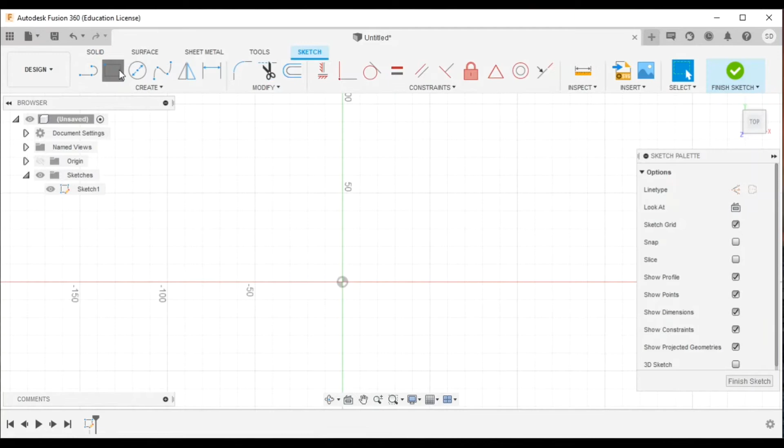In order to make a drone, first we need to create some sketches. For that, I will make a rectangle of 65 by 15 millimeters. Then I will create a line 150 by 150 and at a 45-degree angle.

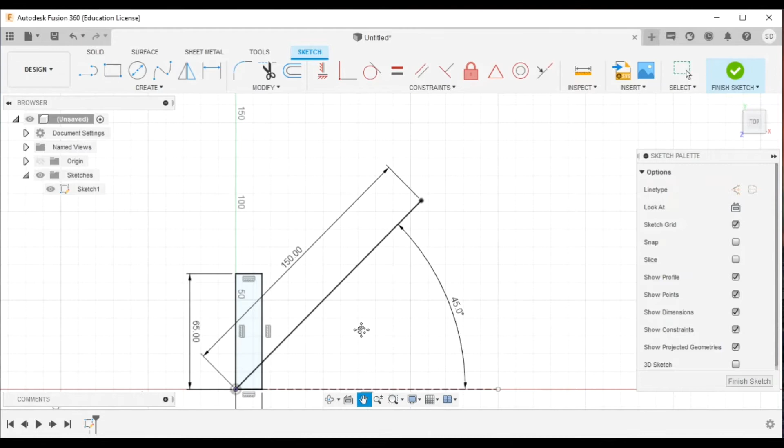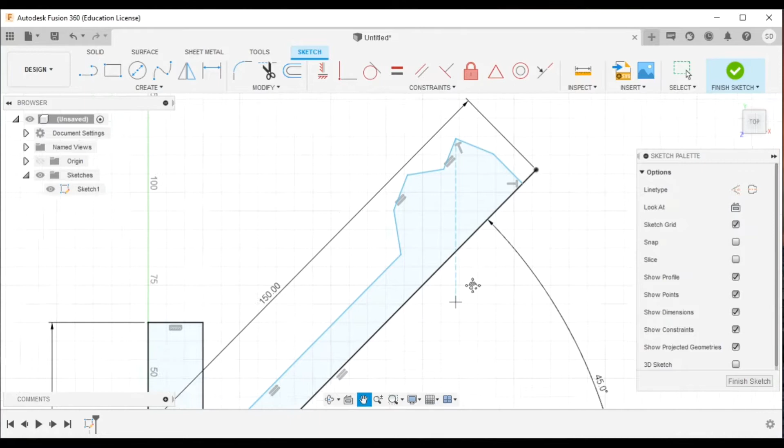Then I'll create some structures like this. Since our drone is fairly symmetrical, we can create one part of it and then mirror it 4 times, so that will be easier.

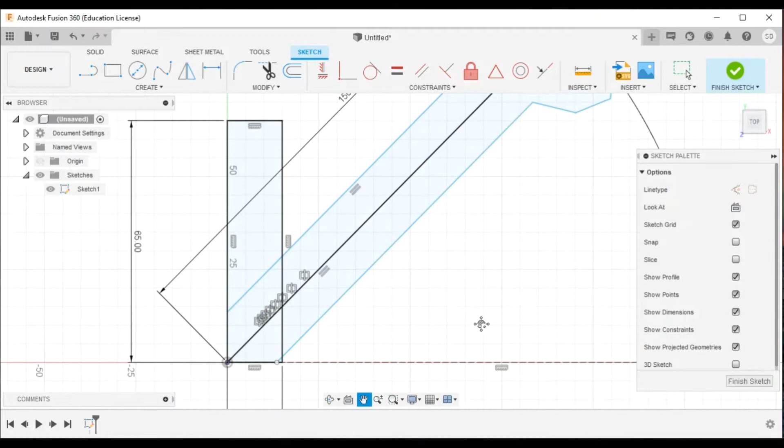So we can drag these points and adjust, and then I'll mirror this. Select these lines and choose mirror line, this middle one. Then let's adjust this rapidly.

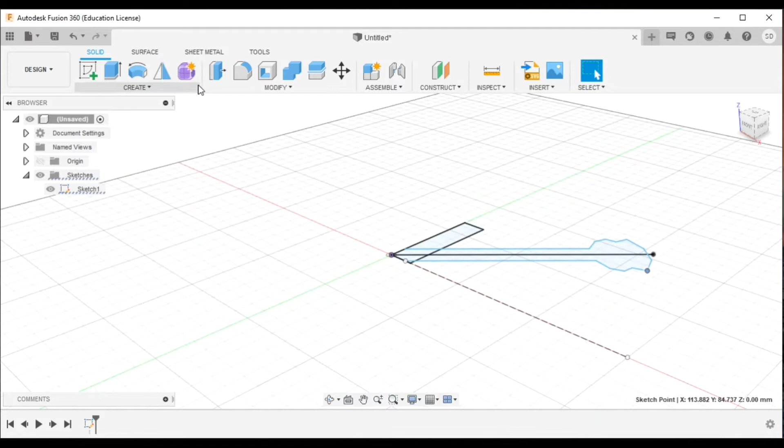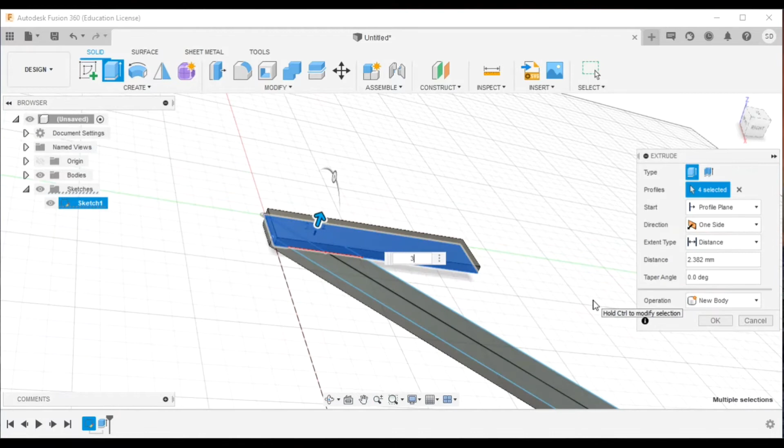After we finish, we will finish the sketch and then let's extrude. I will select all these closed paths and extrude it -3 millimeters, and then from this browser dropdown I will bring back the sketch and extrude the remaining part. Remember, the operation should be new body.

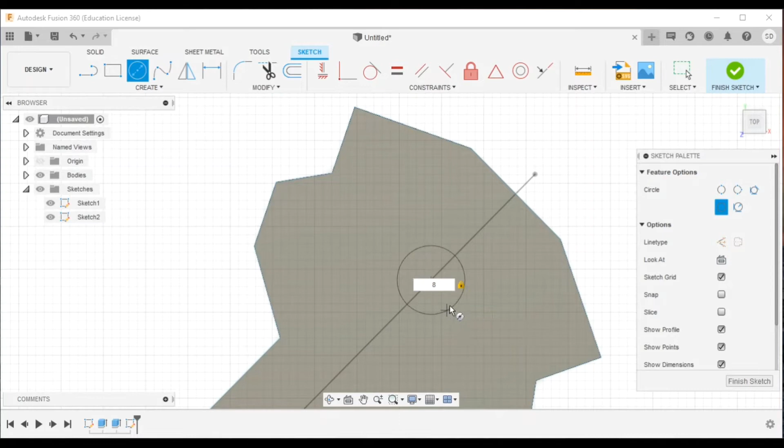Then we need to create some holes for the motor to fit in. This is the place where the blades will be present, so let's make it 8 millimeters in diameter. Let's adjust it.

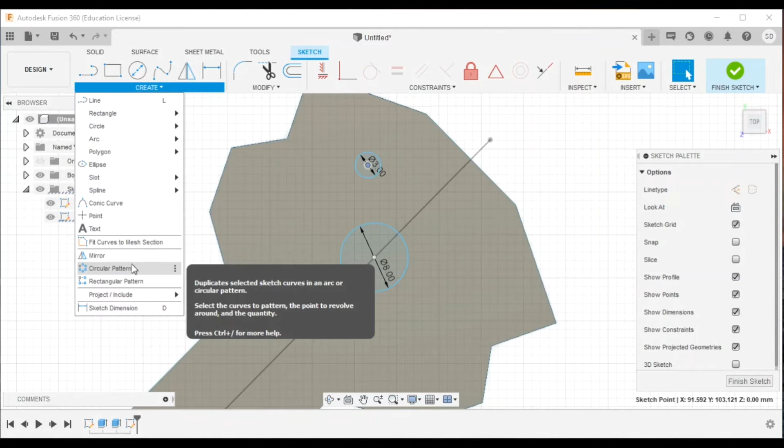Then we need to make some holes for the screws to fit in. So for that I'll make those circles, and then I'll use circular pattern to create 4 of these circles.

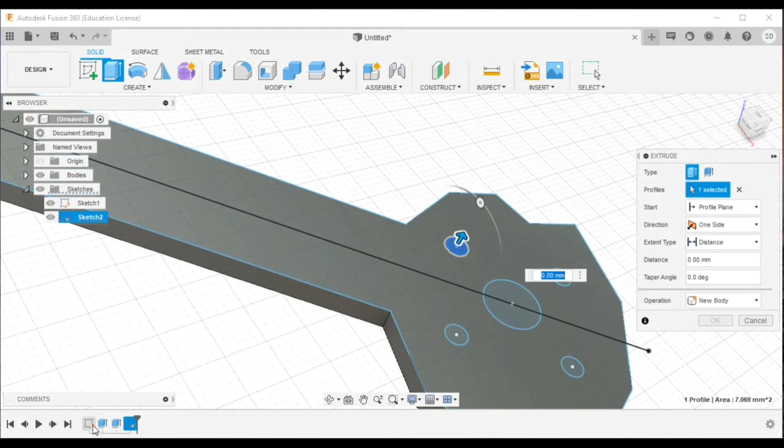Then I'll finish the sketch, and using the extrude tool we can cut this. The other sketch is creating some problems, so I'll turn that off, and using extent type to object we can cut a hole through this material.

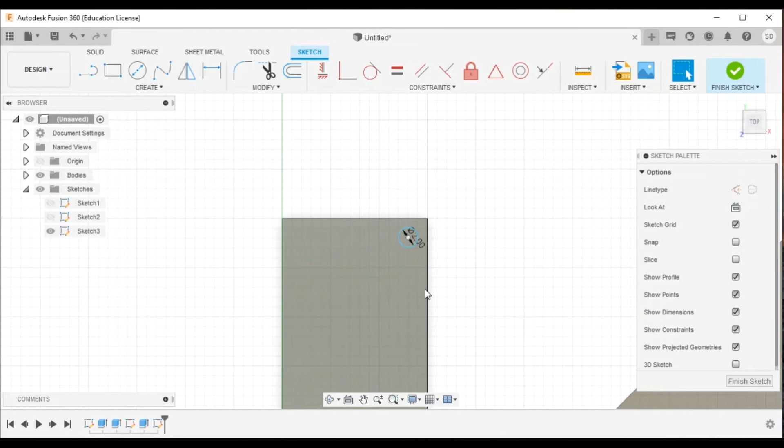And in the body of the drone let's make some support. So we can extrude this shape upward, let's say 20 millimeters, and the operation should be new body.

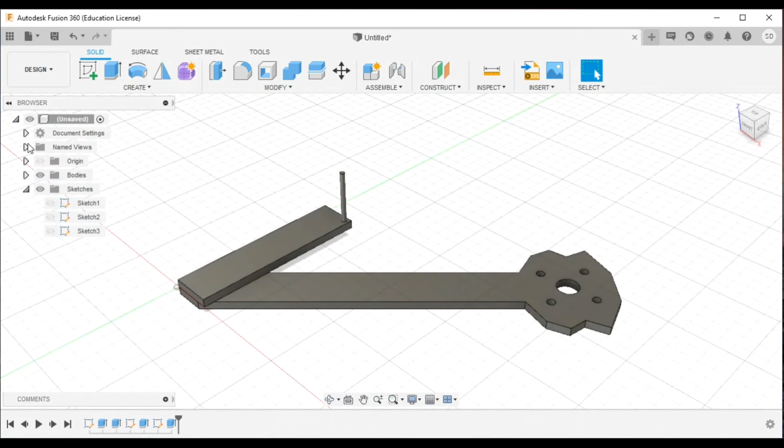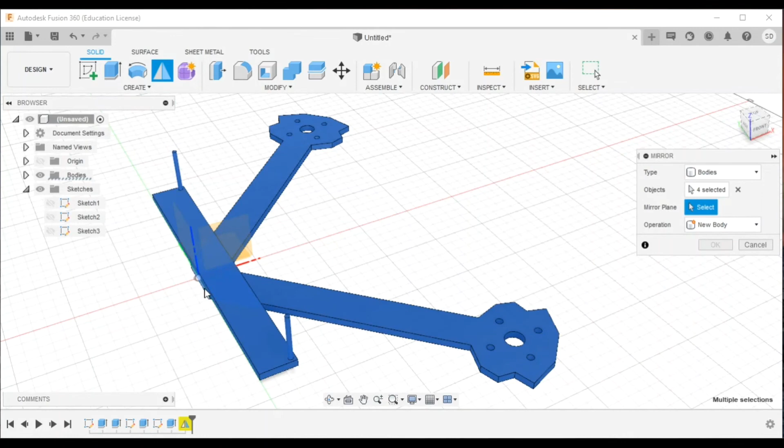And so we finish. Now we need to mirror this using the mirror plane, and the operation is join. Then we can do this again: make a crossing window, choose a mirror plane, and with join operation press OK.

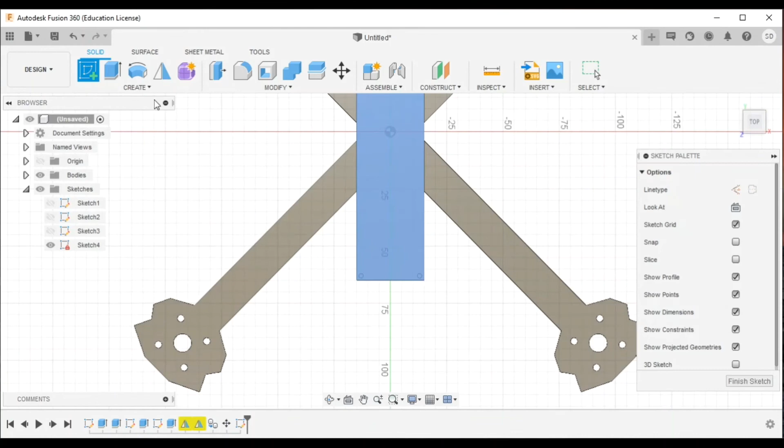Now we can copy this below part to 20 millimeters, and then let's make a cutout in front so that we can put any camera or anything like that. For that I will use the extrude command to cut.

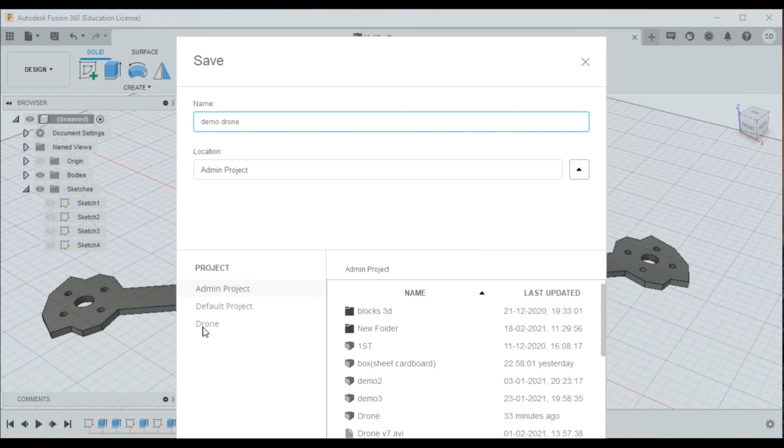Then we can save this drawing as demo drone in the project that we created. We save it, and as we can see on top, the demo drone is created.